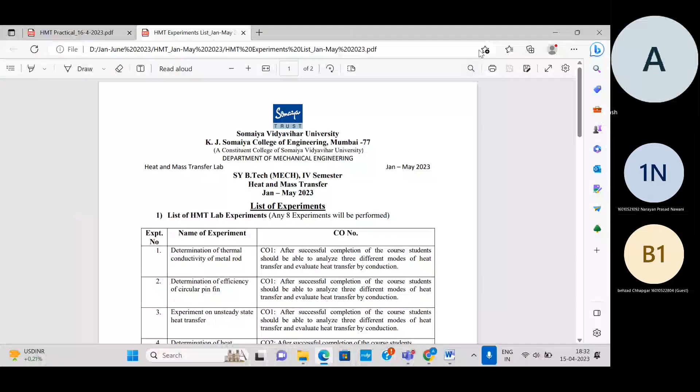Okay, so I've shared the screen. Yes, can you see my screen properly? The list of experiments?

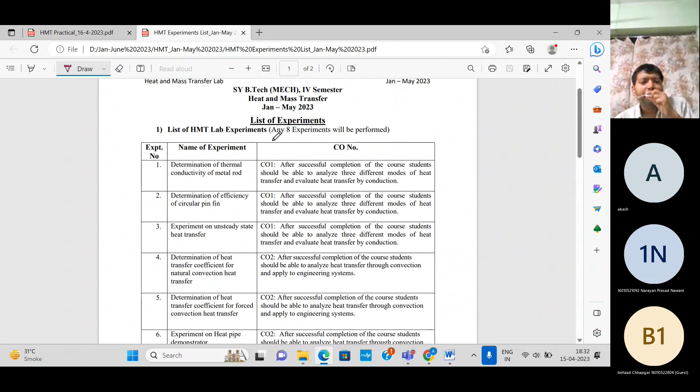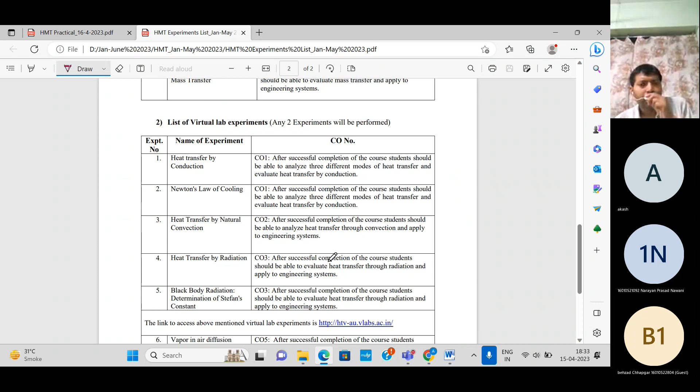We have already performed 8 experiments from this lab experiment list, and this is a list of virtual lab experiments. From this list, we have to perform two virtual lab experiments: heat transfer by natural convection, and black body radiation, that is determination of Stefan's constant.

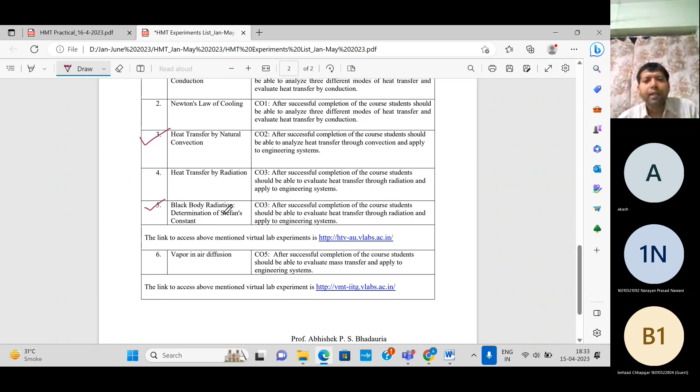Now you just see here, I've given the link to access these virtual lab experiments. One way to perform the experiment is you just click on this link, and you will be able to access any virtual lab experiment. Another way is you just go to Google.

Just give me a minute. You just go to Google and you just type: virtual lab experiments, heat transfer, natural convection.

So it will open this page. Now you click on this heat transfer by natural convection. The page will open.

You can see there are 7 tabs: tab 1 is the theory tab, tab 2 is the procedure tab, tab 3 is the self evaluation tab, tab 4 is the simulator tab, tab 5 is the assignment tab, tab 6 is the reference tab, and tab 7 is the feedback tab. First I will talk about the tabs.

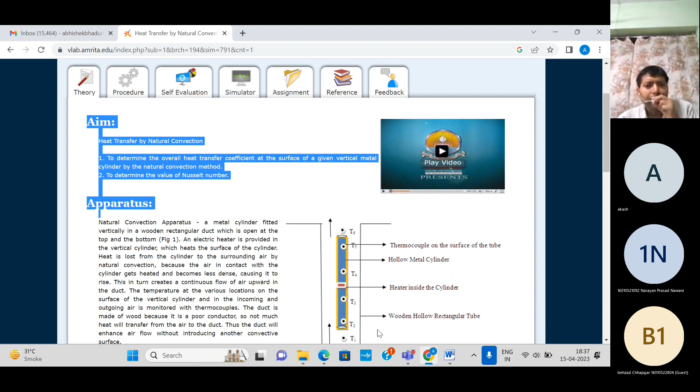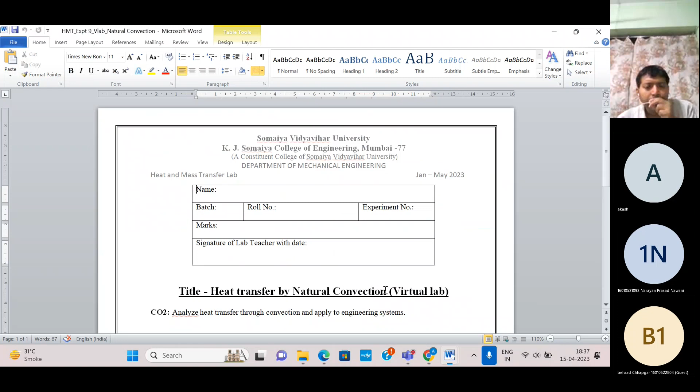What you need to do is, in the theory tab, copy all the details right from the aim to the last part, that is the application section. Copy all the details from the theory tab, go to the word file template of this experiment, and where I've written 'virtual lab details,' paste the entire content there.

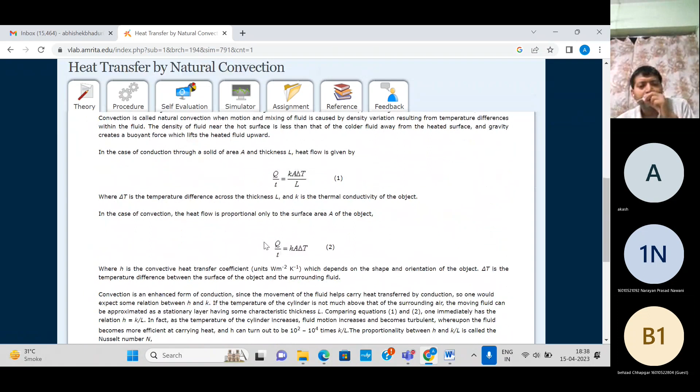Now see, this is the second tab I clicked, the procedure tab. So from the start, the theory tab is automatically enabled by default. In the theory tab, you can see the aim, the apparatus, and the construction of the setup, the theory related to this concept and experiment, and the applications. I will explain all these things later.

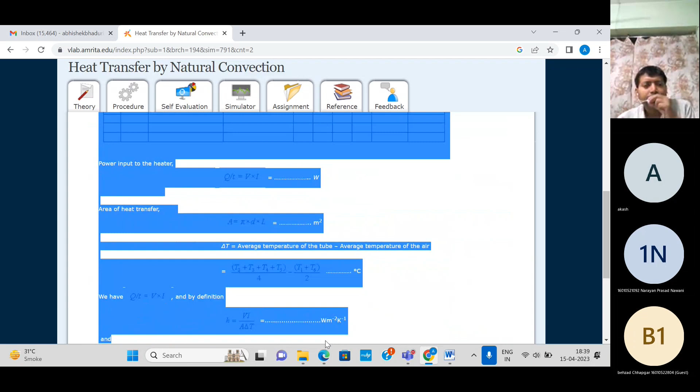ये पूरा सेलेक्ट करके इसे कॉपी करो, और उसके बाद वर्ड फाइल टेम्पलेट में जा करके यहाँ वर्चुअल लैब डिटेल्स में जो आपने थ्योरी टैब के डिटेल्स कॉपी करके पेस्ट किए थे, उसके नीचे आप पेस्ट करो सारी डिटेल्स जो प्रोसीजर टैब में मेंशन्ड हैं। ठीक है, इसके बाद आपको क्या करना है

Now after this, you just see this, the third tab is self evaluation tab. When you will click on this self evaluation tab, you will get the MCQs, multiple choice questions. You can solve those multiple choice questions for enhancing your knowledge, for testing your knowledge, but it is not the part of submission.

Now the fourth tab, that is the most important tab, that is the simulator for making the simulation.

अब इसमें क्या करो आप, you just click here. So you will be able to open this window in the full screen. Okay, now you just see this.

This is the setup. अभी सेटअप में क्या करो आप, यहाँ पर ये देखो, यहाँ पर सब डिटेल्स दिया हुआ है, सेटअप का कंस्ट्रक्शन डिटेल्स है, सब कुछ दिख रहा है। Here what is this, duct is there which is open at the top and at the bottom, and we have fitted this

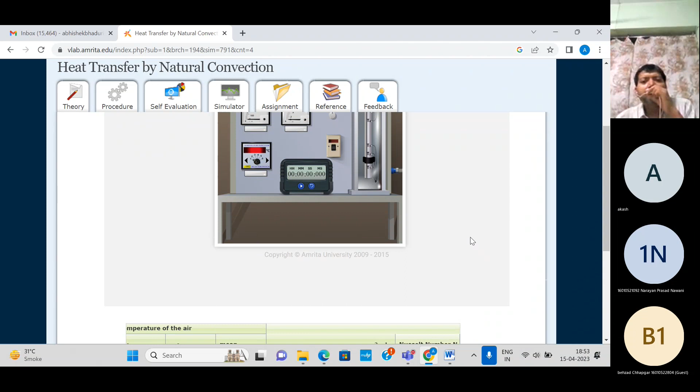हाँ सर, और सर कंपेयर किससे करना है? प्रैक्टिकल. कंपेयर करना है आपको सिमुलेटेड रिजल्ट. मैं भी बताऊंगा जैसे हम सिमुलेशन करेंगे. देखो अभी हमने परफॉर्म नहीं किया तो यहाँ पे 0 0 वैल्यू दिख रही है, दिख रहा है कर्सर मेरा. जब इसको ऑन करेंगे और सिमुलेशन हो जाएगा तो आफ्टर द कंप्लीशन ऑफ सिमुलेशन इट विल डिस्प्ले द सिमुलेटेड वैल्यू ऑफ कन्वेक्टिव हीट ट्रांसफर कोफिशिएंट एंड नसेल्ट नंबर. सो ये सिमुलेटेड रिजल्ट्स हैं.

ओके, सो इसके साथ आपको कंपैरिजन करना है तो वो ऑटोमेटिक आ जाएगा. ठीक है, तो मैंने आपको बताया कि एनालिटिकली कैसे कैलकुलेशन करनी है सैंपल. तो यहाँ पर आपको करने की जरूरत नहीं पड़ेगी, आप जस्ट वैल्यू फीड करेंगे तो ऑटोमेटिकली कैलकुलेट कर देगा. लेकिन यहाँ पे टेम्पलेट में आप जस्ट शो कर देना वन और टू सैंपल कैलकुलेशन. Q इज इक्वल टू एच ए डेल्टा टी. एंड नसेल्ट नंबर इज इक्वल टू एच एल बाय के. टू सैंपल कैलकुलेशन यू जस्ट शो हियर.

चलिए अभी हम वन बाय पूरा देख लेते हैं क्या थ्योरी है एंड प्रोसीजर, और उसके बाद सिमुलेशन कैसे करना है, सो दैट वी विल बी एबल टू परफॉर्म दिस एक्सपेरिमेंट. ओके, सो लेट्स गो टू द ओके.

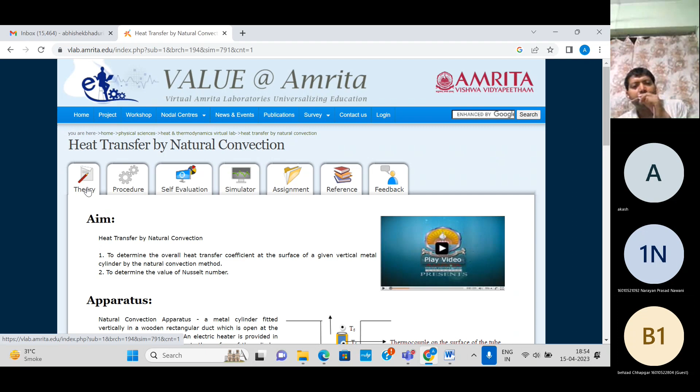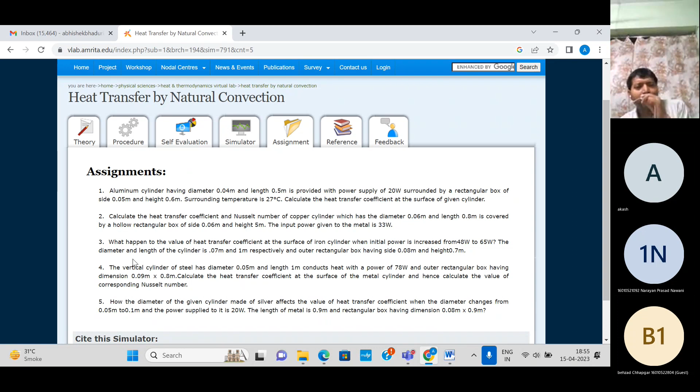हाँ, थोड़ी सी बात ये और रह गई थी. मैंने आप लोगों को टैब के बारे में बताया था. तो यू जस्ट रिमेंबर ओनली 3 टैब्स आर इंपॉर्टेंट फॉर परफॉर्मिंग दिस एक्सपेरिमेंट - टैब नंबर 1 थ्योरी टैब, टैब नंबर 2 प्रोसीजर टैब एंड टैब नंबर 4 सिमुलेटर टैब. सेल्फ इवैल्यूएशन टैब में जब आप जाएंगे, इट विल डिस्प्ले MCQ, सो यू कैन सॉल्व दोज़ MCQs फॉर टेस्टिंग योर नॉलेज, फॉर एन्हांसिंग योर नॉलेज, बट इट इज नॉट द पार्ट ऑफ सबमिशन. एंड जब आप असाइनमेंट टैब पे क्लिक करेंगे, सो इट विल शो द असाइनमेंट क्वेश्चंस, सो यू कैन सॉल्व दोज़ असाइनमेंट क्वेश्चंस फॉर एन्हांसिंग योर नॉलेज, बट इट इज आल्सो नॉट द पार्ट ऑफ सबमिशन. ठीक है, एंड रेफरेंस टैब में द डिटेल्स आर मेंशन्ड फॉर प्रिपेयरिंग दिस वर्चुअल लैब एक्सपेरिमेंट, सो आल्सो नॉट द पार्ट ऑफ सबमिशन.

हाँ, जब आप ये वर्चुअल लैब एक्सपेरिमेंट कर लेंगे देन यू गिव द फीडबैक. ठीक है, जिसमें फीडबैक आप जरूर दे देना. तो फीडबैक के लिए इट विल आस्क फॉर लॉग इन. इन फैक्ट, इट मे आस्क टू लॉग इन फॉर द सिमुलेटर आल्सो. ओके, सो इफ यू हैव नेवर विजिटेड दिस वर्चुअल लैब वेबसाइट, सो फर्स्ट ऑफ ऑल यू जस्ट रजिस्टर ऑन दिस वर्चुअल लैब वेबसाइट. ओके, सो आफ्टर द सक्सेसफुल रजिस्ट्रेशन, यू विल गेट वन यूजरनेम एंड पासवर्ड. सो विथ दैट यूजरनेम एंड पासवर्ड, यू कैन लॉग इन टू दिस वर्चुअल लैब वेबसाइट एंड यू कैन एक्सेस एनी वर्चुअल लैब एक्सपेरिमेंट. ठीक है, तो आप लोग ये फीडबैक जरूर दे देना वर्चुअल लैब एक्सपेरिमेंट का, परफॉर्म करने के बाद, बिकॉज दे आस्क दिस.

सर ओके, फीडबैक को पेस्ट करना है क्या इस पे? नहीं नहीं नहीं, फीड पेस्ट नहीं करना है. हाँ, पेस्ट नहीं करना है, जस्ट आप दे देना, क्योंकि दे आस्क दिस टू गिव द फीडबैक आफ्टर परफॉर्मिंग दिस. ओके, यूनिवर्सिटी पर्सन आस्क दिस कि यू कन्वे द मैसेज टू द स्टूडेंट, सो कि आफ्टर परफॉर्मिंग द एक्सपेरिमेंट यू जस्ट गिव द फीडबैक. तो आप लोग फीडबैक प्लीज दे दीजिएगा, कॉपी पेस्ट करने की जरूरत नहीं है.

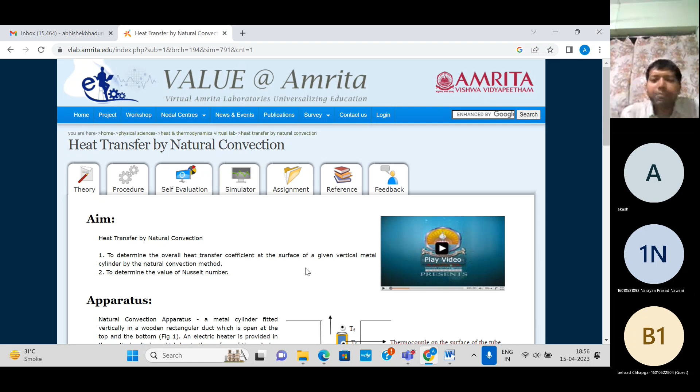ओके, चलिए अभी हम आते हैं दैट. अभी यहाँ पर देखिए, व्हाट इज द एम फॉर परफॉर्म दिस एक्सपेरिमेंट. सो द एम फॉर परफॉर्म दिस एक्सपेरिमेंट इज, फर्स्ट ऑफ ऑल यू जस्ट मेक द करेक्शन. यहाँ पर लिखा हुआ है टू डिटरमाइन ओवरऑल हीट ट्रांसफर कोफिशिएंट, लेकिन इट इज नॉट ओवरऑल हीट ट्रांसफर कोफिशिएंट. ओवरऑल हीट ट्रांसफर कोफिशिएंट इज डिनोटेड बाय कैपिटल U. ओके, वी आर नॉट गोइंग टू कैलकुलेट ओवरऑल हीट ट्रांसफर कोफिशिएंट. वी हैव टू कैलकुलेट कन्वेक्टिव हीट ट्रांसफर कोफिशिएंट, दैट इज स्मॉल h. ओके, सो दिस इज अ करेक्शन. सो वी हैव टू डिटरमाइन द कन्वेक्टिव हीट ट्रांसफर कोफिशिएंट, दैट इज स्मॉल h, एट द सरफेस ऑफ अ गिवन वर्टिकल मेटल सिलिंडर. ओके, दिस इज अ गिवन वर्टिकल मेटल सिलिंडर. फाइन, बाय द नेचुरल कन्वेक्शन मेथड. ओके, सो हियर नेचुरल कन्वेक्शन इज गोइंग ऑन, सो वी हैव टू कैलकुलेट द कन्वेक्टिव हीट ट्रांसफर कोफिशिएंट फ्रॉम द सरफेस ऑफ दिस वर्टिकल मेटल सिलिंडर.

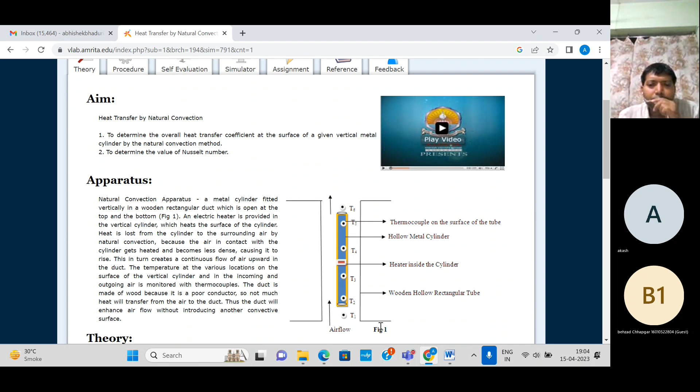So let's see the construction of this setup. You just see what is this - this is a rectangular tube, so it is like a duct. We have taken a duct which is open at the bottom and at the top, and we have placed a metal cylinder, fitted in the vertical fashion inside this duct.

Very simple - what we have done is we have taken this rectangular tube, that means a duct which is open at the bottom and at the top. Now we have fitted a metal cylinder vertically inside this duct. We have placed the heater along the length of this vertical cylinder. We have placed 4 thermocouples at 4 different locations along the length of this vertical cylinder, that is T2, T3, T4, T5. And we have placed 2 thermocouples, T1 and T6, for measuring the ambient air temperature inside this duct.

Now what we will do is provide the power supply to the apparatus. We will turn on the heater, so the heater will heat the surface of this vertical cylinder. So the heat transfer takes place by natural convection from the surface of this vertical cylinder to the air that is available inside this duct.

We have to record the temperature value at the 6 different locations - that is 4 on the metal cylinder and 2 for measuring the ambient temperature - every 15 minutes, again and again, till steady state is reached. After achieving steady state, we have to use the steady state temperature values for making calculations.

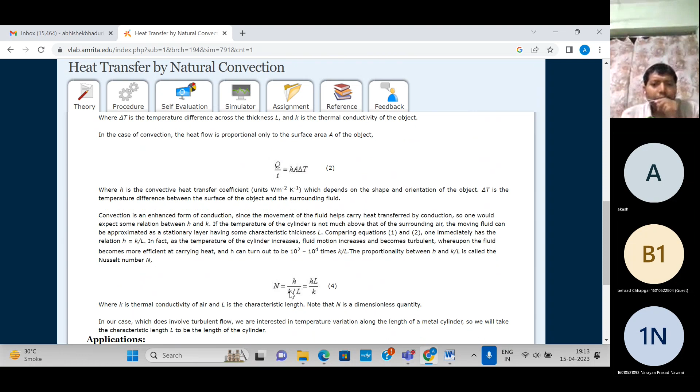Now we know what is the Nusselt number. We have discussed the physical significance and importance of all the dimensionless numbers in detail in the lecture. We know this Nusselt number is HL by K, where H is the convective heat transfer coefficient, L is the characteristic dimension, and K is the thermal conductivity. So this Nusselt number can be either HL by K or HD by K, depending on what is our characteristic dimension. It can be length or it can be diameter.

So here it is L, L is the characteristic dimension, that's why the Nusselt number is HL by K. With this expression we can calculate H, the convective heat transfer coefficient, and with this expression we can calculate the Nusselt number. This is how we calculate the analytical value of the convective heat transfer coefficient and Nusselt number.

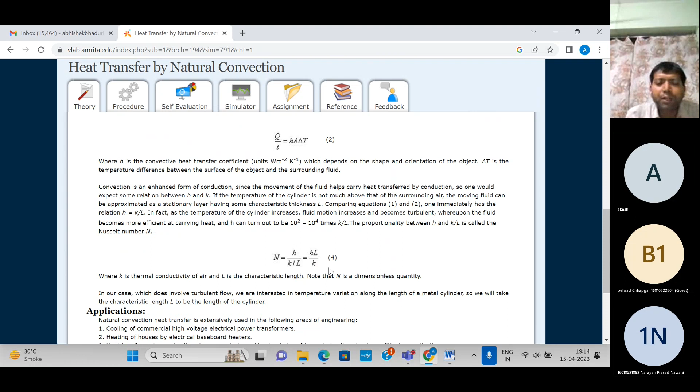Now these are the applications mentioned here where we can see natural convection. We can see the natural convection phenomena in the cooling of commercial high voltage electrical power transformers, in the heating of houses by electrical baseboard heaters. Another general application is the heat loss from steam pipelines in power plants and heat gain in refrigerant pipelines in air conditioning applications, and so on. So these are the various applications of natural convection.

Now let's see the procedure. We'll click on the procedure tab. Just see the steps, read each and every step and follow it, so we will be able to perform this natural convection experiment very comfortably.

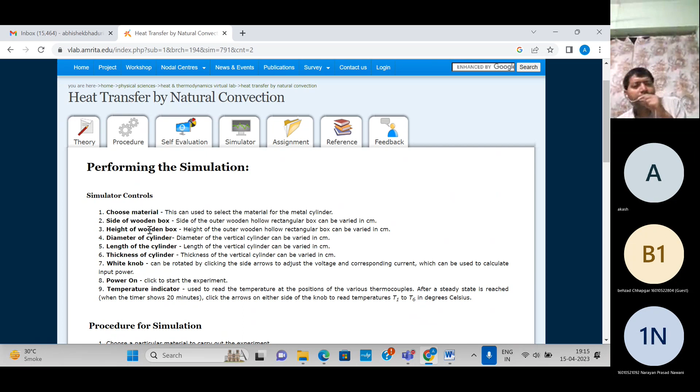Now, let's come to the procedure. First step is we will choose the material. The drop down list is there, from the drop down list we'll choose the material - aluminium, copper, and likewise we can select the material.

Now the side of the wooden box, a slider is there, so with the help of the slider we can change the dimension for the side of the wooden box. By sliding the slider, we can give the input value to the height of the wooden box. In the similar fashion, by just sliding the slider, we can assign the input value to all the parameters - we can give the input value to the diameter of the cylinder, length of the cylinder, thickness of the cylinder, and the white knob is there.

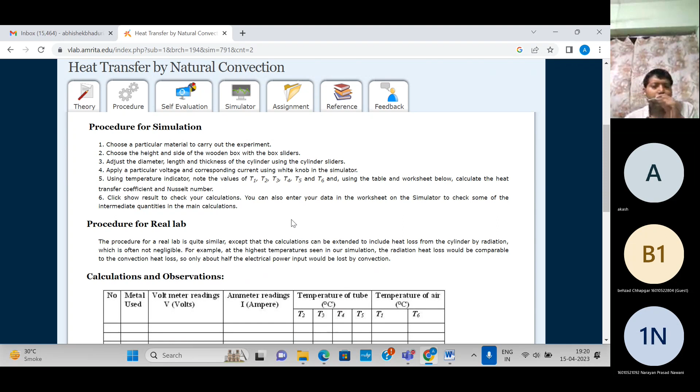And then when we click on the result, it will show the simulated result for H and Nusselt number in the bottom right corner. So these results will be the simulated results.

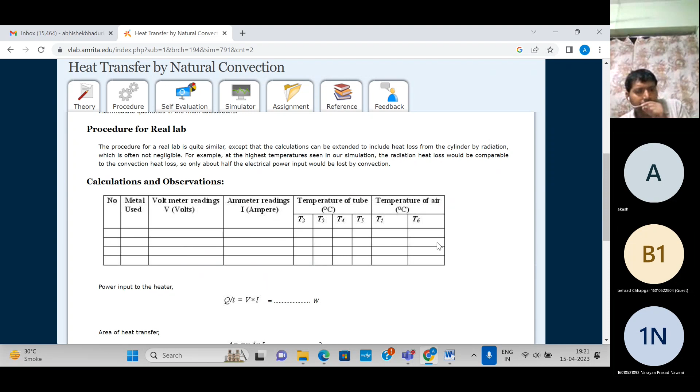Okay, so we can fill the table like this. Now how can we calculate Q?

Ignore the small t, just write Q. Q is the heat input, which is nothing but the product of voltage and current. We know the value of voltage and the corresponding current value. We'll take the product of voltage and current, and this way we can calculate the heat input value.

How can I calculate area? This is surface area, and this is the metal. This is a cylinder, a tube, so it's like a cylinder. The surface area for the cylinder is pi into d into L. D is the diameter of the cylinder, L is the length. We know the diameter and the length, so we'll take the product, and this way we can calculate the surface area.

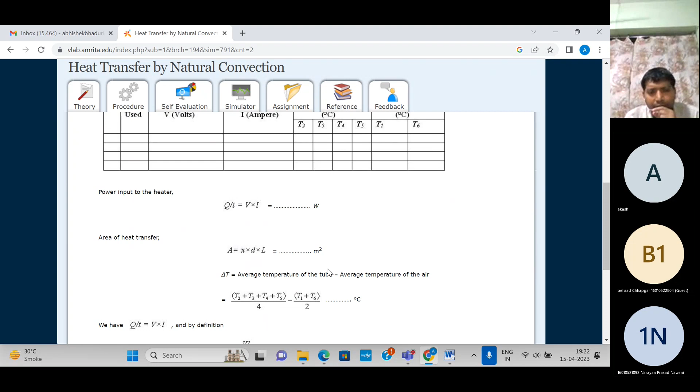Now we know the formula for calculating H. We'll apply Newton's law of cooling. So Q is equal to H into A into delta T.

How did we calculate Q? By taking the product of voltage and current. Now surface area we have also calculated.

Now how to calculate delta T? Delta T is Ts minus Ta. Ts is the average steady state temperature value on the surface of the metal cylinder, that is T2 plus T3 plus T4 plus T5 divided by 4. Ta is the average steady state temperature of the surrounding, that is T1 plus T6 divided by 2. So we'll take the difference, and this is how we can calculate delta T.

So Q is equal to H into A into delta T. Q we have calculated by taking the product of voltage and current, surface area we have already calculated, and delta T we have already calculated. In this way we can calculate the convective heat transfer coefficient analytically.

Now we have to calculate the Nusselt number. Nusselt number is equal to HL by K. The H value we have already calculated. We know the characteristic dimension of this tube, that is the length of the tube. You just mention the length of the tube and divide by K. K is the thermal conductivity of air. So what is the normal procedure to take the thermal conductivity of air?

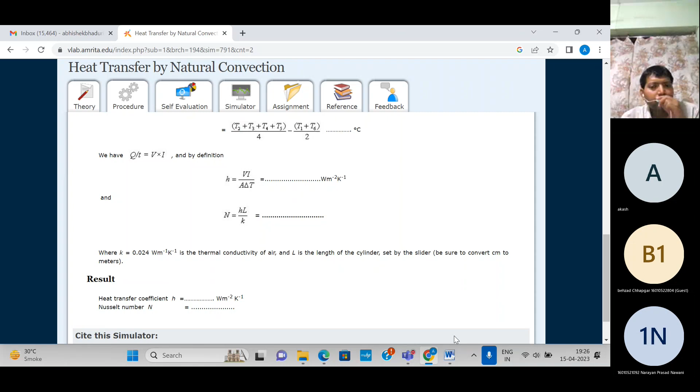चलिए, इसके बाद फिर आपका कुछ भी नहीं रहता है, फिर आप यहाँ पर 2 सैंपल कैलकुलेशन दिखा दिया आपने एनालिटिकल, हाउ टू सैंपल कैलकुलेशन फॉर कैलकुलेटिंग कन्वेक्टिव ट्रांसफर कोफिशिएंट नसल नंबर, और इधर आप रिजल्ट दिखा दो। रिजल्ट आप टेबुलेटेड फॉर्म में भी दिखा सकते हैं, एच और नसल्ट नंबर का एनालिटिकल और सिमुलेटेड रिजल्ट।

सर जो सिमुलेशन से सब जो वैल्यूज आएंगे वो टेबल में उसका स्क्रीनशॉट डालना है ना? हाँ, स्क्रीनशॉट जब आप लोगे तो उसमें सब वैल्यूज आ जाएंगे डायरेक्टली, लेकिन यहाँ रिजल्ट में आपको थोड़ा लिखना पड़ेगा टेबल बना के। और कंक्लूजन में जब फिर आपके रिजल्ट कंपेरेबल आए, तो फिर यू राइट द मीनिंगफुल कंक्लूजन एट द लास्ट।

ठीक है। और ये जस्ट, देखो अभी कैसे लिख सकते हो मैं बताता हूँ। रिजल्ट आप ऐसा बना सकते हो, मैं 1 मिनट, देखो आप टेबल ऐसा बना सकते हो।

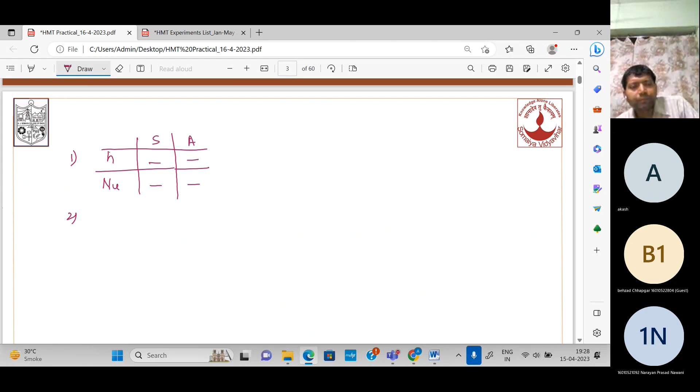देखो इधर आपका आ गया जैसे एच और नसल्ट नंबर। ठीक है। यहाँ पर आप देख सकते हो, यहाँ पर आपका सिमुलेटेड रिजल्ट क्या आ रहा है, और यहाँ पर आपका एनालिटिकल रिजल्ट क्या आ रहा है। इस तरीके से यू कैन राइट, तो यू विल मेंशन द एच वैल्यू, सिमुलेटेड रिजल्ट, एनालिटिकल रिजल्ट, और नसल वैल्यू, सिमुलेटेड और एनालिटिकल। इस तरीके से आप ऐसा लिख सकते हो, केस 1, फिर यहाँ 2, 3, ऐसा करके। अंडरस्टूड।

हाँ सर, ये कैलकुलेशन में डालना है ना सर, रिजल्ट में डालना है ना ये? हाँ हाँ, रिजल्ट में। ठीक है, ऐसे लिख सकते हो, 1 के लिए क्या आया, 2 के लिए क्या आया, 3 के लिए, आप ऐसा टेबल बना सकते हो सीरियल नंबर वगैरह करके। फिर 2 आ गया, फिर 3 आ गया, ऐसा 4, 5 ऐसा करके कर सकते हो, तो दिस इज वन वे टू प्रेजेंट द रिजल्ट। अदरवाइज आपको जैसा आप प्रेजेंट करना चाहें वैसा भी कर सकते हैं।

ओके, अभी देखते हैं सिमुलेशन कैसे करते हैं। जस्ट गिव मी अ मिनट, जैसे हम फिर देखते हैं।

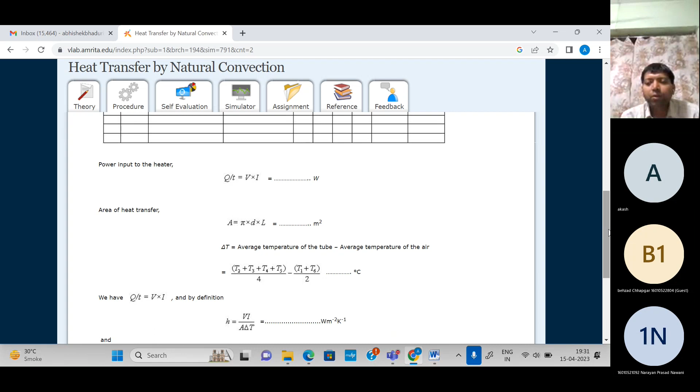हाँ सर। Okay. सर ये जो कैलकुलेशन का ये सब जो पार्ट है इसमें कुछ ऐड नहीं करना है ना, बस टेबल फिल करना ना। नहीं नहीं, कैलकुलेशन जो है आपने इसमें आपको कुछ नहीं करना है, समझाने के लिए बताया। देखो आप तो टेम्पलेट कंप्लीट करो, दैट्स इट।

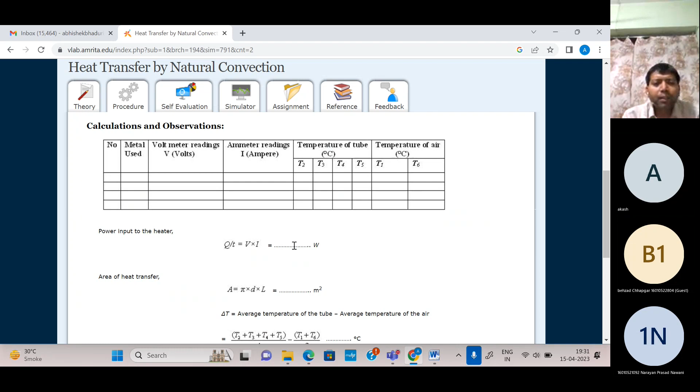पीछे वाले पेज में वो आप सर वर्चुअल लैब वाले पेज पे जाओ ना। हाँ ये सब सर, ये सब ऐड किया ना हम लोग ने उसमें, उसके लिए पूछ रहा हूँ। हाँ देखो, ये सब कॉपी करके पेस्ट कर देना उधर वर्चुअल लैब डिटेल में, यहाँ पे चला जाएगा पूरा। हाँ सर, उसको पेस्ट करना, बट उसको फिल भी करना है ना, कि उसको रहने दो। वो मैं आपको बताता हूँ, अभी वो फिल हो जाएगा। सिमुलेशन करेंगे ना, तो वो मैं आपको टेबल बताऊंगा। मैंने बताया था ना एनालिटिकल कैसे कैलकुलेट हो रहा है, उसे ऑटोमेटिक वो टेबल्स बन जाएंगे, आपको उधर कुछ अलग करने की जरूरत नहीं है।

ये तो समझ में आया ना कैसे टेम्पलेट कंप्लीट करना है? हाँ सर। हाँ ठीक है, तो जस्ट अ मिनट, हम जाएंगे। हाँ, आपको दिख रहा है ये स्क्रीन? हाँ सर।

चलिए अभी हम ये देखेंगे सिमुलेशन में। सो जस्ट विल सी हाउ टू मेक द सिमुलेशन। विल क्लिक ऑन सिमुलेटर। अभी यहाँ पे यू क्लिक हियर, सो द यू विल बी एबल टू ओपन दिस इन द फुल स्क्रीन। ठीक है, अभी आप लोग वैल्यूज लिखते जाना, क्योंकि पहला केस जो है अपना सेम इनपुट वैल्यू के लिए, अदरवाइज हमें याद नहीं रहेगा इनपुट वैल्यूज क्या लिया है। तो ओके, आई एम राइटिंग दिस।

अभी देखो, सबसे पहले अपने को क्या करना है, यहाँ पर देखो दिस इज ड्रॉप डाउन लिस्ट। अभी देखो सेटअप अपने को वही है। Duct is open at the bottom and at the top. Metal cylinder is fitted vertically inside this duct. 4 thermocouples are placed on the metal cylinder. 2 thermocouple for measuring ambient temperature. Voltmeter, ammeter, white knob for controlling, for adjusting voltage value. Temperature indicator for recording temperature value. Main switch and stopwatch.

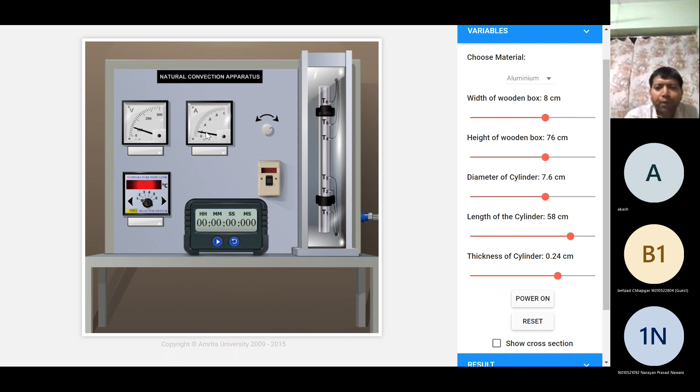ठीक है, अभी ये मैंने मटेरियल ले लिया। अभी क्या करना है, आप जस्ट क्लिक करो यहाँ व्हाइट नॉब पर वोल्टेज वैल्यू एडजस्ट करने के लिए। मैं यहाँ क्लिक करूँगा, देखो 100 वोल्ट है और करस्पॉन्डिंग करंट वैल्यू है 0.2 एम्पियर। इसके बाद आप क्लिक करो शो क्रॉस सेक्शन पर, सो यू विल बी एबल टू विजुलाइज द इंटरनल स्ट्रक्चर।

Now we will click on power on to start the simulation. You just see temperature is changing.

थोड़ी देर रन होने दो इसे। ये देखो, 20 मिनट जैसे ही पहुंचेगा वो स्टेडी स्टेट अचीव कर लेगा, टेम्परेचर स्टॉप्स चेंजिंग। ये फ्लो तो अपने आप दिखता रहेगा, दैट मीन सिमुलेशन इज ओवर। एक्चुअली वर्चुअल लैब में जैसे यहाँ 20 मिनट्स फीड किया हुआ है, वैसे ही वो स्टेडी स्टेट पहुंच रहा है। अल्टीमेटली वी नो व्हाट इज स्टेडी स्टेट, टेम्परेचर स्टॉप्स चेंजिंग। तो उन्होंने ऑटोमेटिक प्रोविजन करके रखा है कि एज द स्टॉप वॉच रीचेस 20 मिनट्स तो स्टेडी स्टेट आ जाता है। एंड ये स्टॉप वॉच का 20 मिनट्स है, एक्चुअल में तो दिस विल बी कंप्लीटेड विदइन अ मिनट।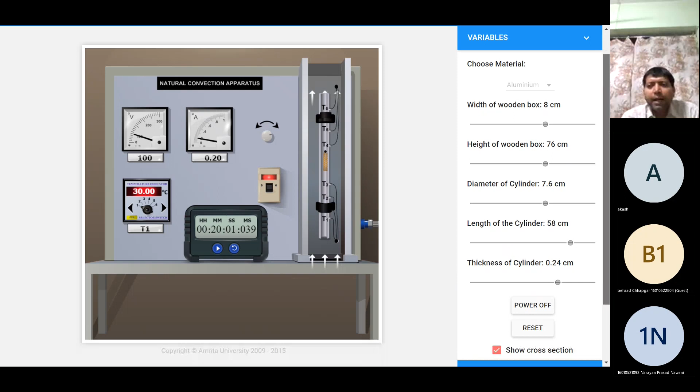Okay, अभी मुझे नेक्स्ट सिमुलेशन करना है, तो रीसेट पे क्लिक करो। रीसेट पे क्लिक किया, नेक्स्ट मटेरियल लेते हैं। देखो केस वन है अपना, वोल्टेज वैल्यू सेम रखना है, मटेरियल बस चेंज करना है, इनपुट वैल्यूज भी सेम रखना है।

इसको फुल स्क्रीन में ओपन किया, मटेरियल चेंज करेंगे। यहाँ पर मैंने अभी नेक्स्ट टाइम कॉपर ले लिया। देखो आपका फिजिकल अपीयरेंस भी चेंज हो जाता है। जब एल्यूमिनियम था तब कैसा दिख रहा था, कॉपर में ऐसा आ गया, आयरन में देखो कैसा हो गया, सिल्वर में, स्टील में - फिजिकल अपीयरेंस चेंज हो रहा है।

Now you just see I have selected copper. Show cross section पे क्लिक किया मैंने। अभी देखो सेम इनपुट वैल्यूज आई विल गिव, विड्थ दिया था 8 सेंटीमीटर लास्ट टाइम भी, क्योंकि सेम इनपुट वैल्यू ही रखना है।

ओके 8 सेंटीमीटर, हाइट ऑफ वुडन बॉक्स 76 लिया था, डायमीटर 7.6 सेंटीमीटर लिया था, लेंथ 58 सेंटीमीटर लिया था, थिकनेस 0.24 सेंटीमीटर लिया था। सो व्हाट आई हैव डन, आई हैव चेंज द मटेरियल। पहले एल्यूमिनियम था,

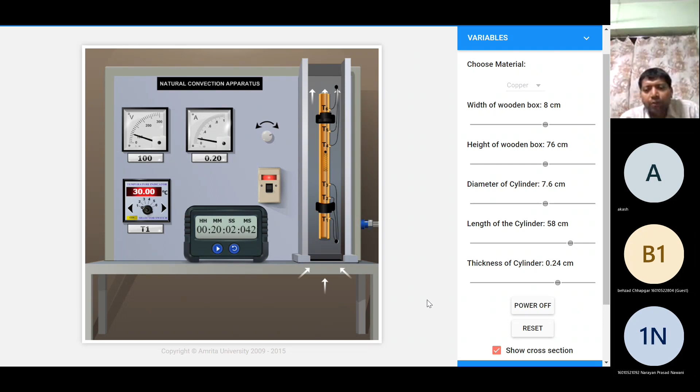Now you just click the result. सर कॉपर का स्टेडी स्टेट अचीव होने के लिए थोड़ा जल्दी होगा ना, 20 मिनट से थोड़ा जल्दी होना चाहिए ना, क्योंकि वो ज्यादा कंडक्टिव है। हाँ देखो, जब हम फिजिकली करेंगे, when we will perform this experiment physically, तब ये डिफरेंस आएंगे। यहाँ पर वर्चुअल लैब में एक ऐसा प्रोग्रामिंग करके रखा है कि 20 मिनट्स में स्टेडी स्टेट आ रहा है।

ओके, ये सारी चीजें तब कंसीडर होंगी जब हम फिजिकली ये सेटअप, फिजिकल सेटअप में लैब में परफॉर्म करेंगे। अभी देखिए रिजल्ट आ गया, तो रिजल्ट इज है ना,

H इज इक्वल टू 2.38394 वॉट पर मीटर स्क्वायर केल्विन, और नसेल्ट नंबर आपका आ गया 75.49128। सो दिस रिजल्ट वी गॉट। अब इस सिचुएशन में, अब नाउ माय एंटायर

सेटअप इज विजिबल, ऑल द इनपुट वैल्यूज आर विजिबल, सो क्रॉस सेक्शन इनेबल्ड है फुल स्क्रीन में। ये मैंने ओपन करके रखा है और सभी रिजल्ट दिख रहे हैं। इस सिचुएशन में यू जस्ट टेक द स्क्रीनशॉट, कॉपी दैट स्क्रीनशॉट

एंड पेस्ट इट एट रिक्वायर्ड प्लेस इन आवर वर्ड फाइल टेम्पलेट। ठीक है, तो इस तरीके में सेकंड सिमुलेशन कर लिया। अब मुझे थर्ड करना है, रीसेट करो पर क्लिक करो।

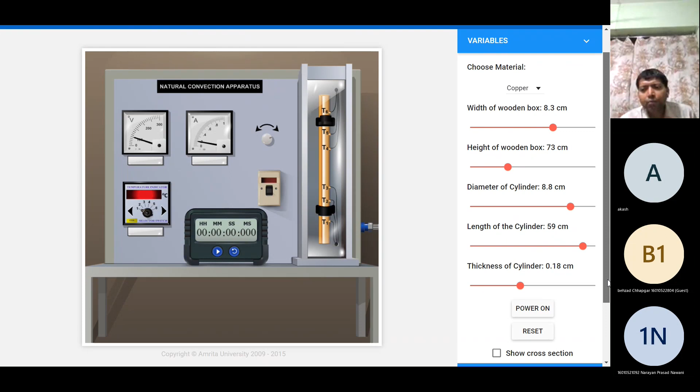तो इस सेकंड केस में क्या करना है, वी हैव टू चेंज द मटेरियल एंड वी हैव टू चेंज द इनपुट वैल्यूज, बट वी हैव टू टेक द सेम वोल्टेज वैल्यू। यानी अगर 100 वोल्ट लिया है तो 100 वोल्ट ही लेंगे सभी, फॉर ऑल द 5 मटेरियल, एंड we'll click on power on। पहले शो क्रॉस सेक्शन कर लेंगे, नाउ वी क्लिक ऑन पावर ऑन।

ठीक है, नाउ इट हैज अचीव्ड स्टडी स्टेट। अभी इसका रिजल्ट देखो, ये आ गया 2.00311, नसेल्ट नंबर इज दिस 60.92। फाइन, नाउ यू टेक द स्क्रीनशॉट, copy that screenshot and paste it at the required place in our word file template for case 2।

ठीक है, तो ऐसे ही आप करते जाना, मटेरियल चेंज करते जाना और इनपुट वैल्यूज चेंज करते जाना, वोल्टेज वैल्यू सेम रखना। इस तरीके से 5 मटेरियल्स के लिए 5 सिमुलेशंस हो जाएंगे। सर इनपुट वैल्यूज हम लोग अपने हिसाब से ले चलेगा? हाँ, अपने हिसाब से ले लो।

ओके सर, ठीक है, अब मैं आपको एनालिटिकल का और दिखा देता हूँ कैसे करना है, दिस इज द लास्ट पार्ट, सो ये हमारा कंप्लीट हो जाएगा। अभी देखो, एक बार एल्यूमिनियम का जो हमने किया था वो एक बार फिर से देखते हैं। तो मैं आपको टेबल में कैसे कैलकुलेट करेंगे, T1 का अपने को टेम्परेचर का वैल्यू मालूम होना चाहिए ना, एक बार देख लेते हैं। देखो, एल्यूमिनियम का सपोज मैंने किया, अभी देखो इसका मैंने वैल्यू लिया 8 पॉइंट सपोज 8 सेंटीमीटर।

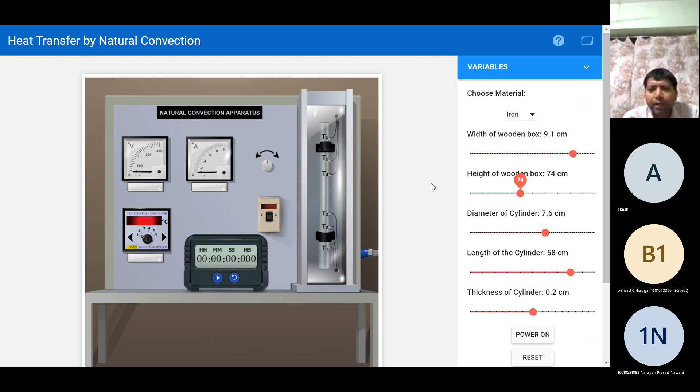चलो सपोज इस बार मैंने आयरन लिया। इस बार मैंने वैल्यूज भी चेंज ले ली है। 9.1 सेंटीमीटर हाइट मैंने ले लिया है, 74 डायमीटर, 6.3 सेंटीमीटर लेंथ ले लिया 55 सेंटीमीटर, थिकनेस ले लिया सपोज 0.15 सेंटीमीटर। तो अभी मैंने क्या किया, शो क्रॉस सेक्शन में क्लिक करो। अभी मैंने मटेरियल भी चेंज किया और इनपुट वैल्यू भी चेंज किया और वोल्टेज वैल्यू मैंने 100 वोल्ट रखा। तो केस 2 का ही करना है, ठीक है। अभी आई विल क्लिक ऑन पावर ऑन।

तो इस तरीके से आप केस 2 का कर सकते हैं ना, बस मटेरियल भी चेंज करते जाओ, इनपुट वैल्यूज भी चेंज करते जाओ, बस वोल्टेज वैल्यू सेम रखना है।

ओके, सो इट हैज रीच्ड 20। सो इट हैज अचीव्ड स्टडी स्टेट। अभी देखते हैं क्या रिजल्ट आ रहा है। रिजल्ट कोई आ गया 3.34, वाट पर मीटर स्क्वायर केल्विन, दिस कन्वेक्टिव ट्रांसफर कोएफिशिएंट नसेल्ट नंबर 103। ठीक है, चलो इसको लिख के रखते हैं। अब हम इस केस का मैं आपको वो दिखा देता हूँ।

अभी देखो, विड्थ इज, मटेरियल इज आयरन, width 9.1, height 74, diameter 6.3, length 55, thickness 0.15। ठीक है, और H का वैल्यू क्या आ गया, H इज 3.34 वाट पर मीटर स्क्वायर केल्विन, नसेल्ट नंबर इज 103.10806।

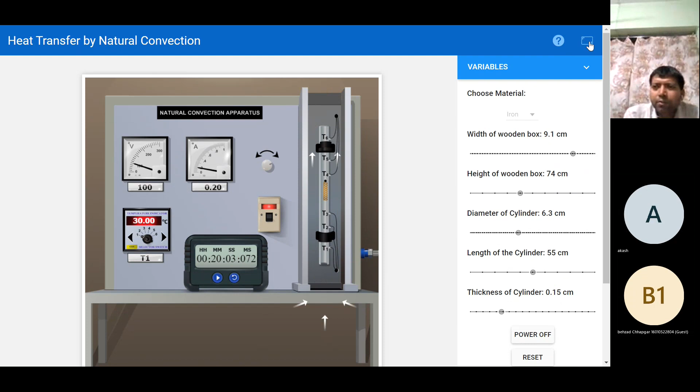ठीक है, तो इस तरीके से आप केस 2 का कर सकते हैं। तो अभी नेक्स्ट में भी आप बस मटेरियल चेंज करते जाना। चलिए अभी हम इसको स्मॉल स्क्रीन में किया। अभी देखो, टेबल में कैसे करेंगे इसका ही केस लेते हैं।

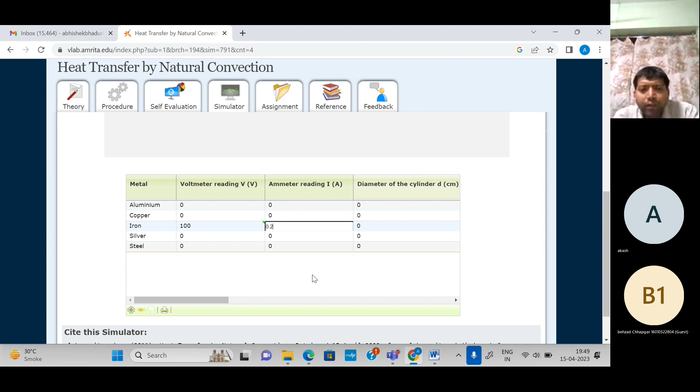देखो आयरन, आयरन के वोल्टेज वैल्यू कितना है, आप ही लोग बताओ। 100 वोल्ट, करंट 0.2। तो देखो आयरन वाले टेबल में आप इधर 100 वोल्ट पुट करो, करंट 0.2 एम्पियर। अभी डायमीटर पुट करो, डायमीटर कितना था सिलेंडर का, यहाँ से देखो आप, डायमीटर है 6.3 सेंटीमीटर, लेंथ है 55 सेंटीमीटर।

डायमीटर 6.3, लेंथ इज 55। तो पाई डीएल से ऑटोमेटिकली इट विल कैलकुलेट द सरफेस एरिया। अभी देखो T2 T3 T4 T5 ये वैल्यूज कहाँ से आएंगे, ये देखो आप यहाँ पे क्लिक करो तो यू विल गेट दिस। आप ही लोग बोलो T2 के कितना दिख रहा है, 23.98। हाँ 23.98।

अभी T2 T3 देखेंगे, I will click here. What is T3? आप ही लोग बोलते जाइए, कितना है T3? 25.98। अच्छा 25.98 है ना। चलो मतलब आ गया समझ में आप लोगों को। तो अभी मैं दिखा के करता जाता हूँ 25.98।

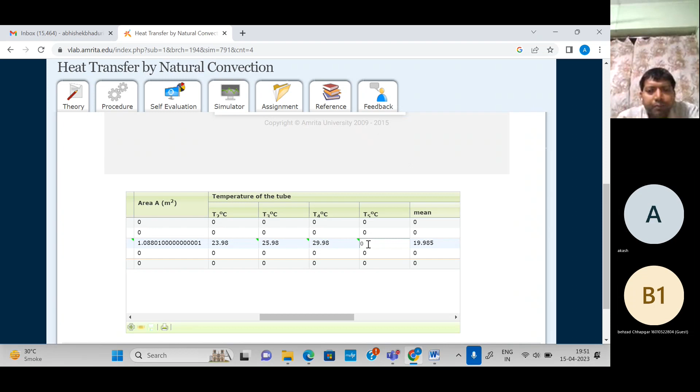अभी देखो T4, इधर T4 पे क्लिक किया, देखो ये टेम्परेचर आएगा 29.98, ठीक है। T5, T5 है 31.98। देखो एवरेज वैल्यू उसने ऑलरेडी कैलकुलेट कर रही है। एवरेज वैल्यू क्या है?

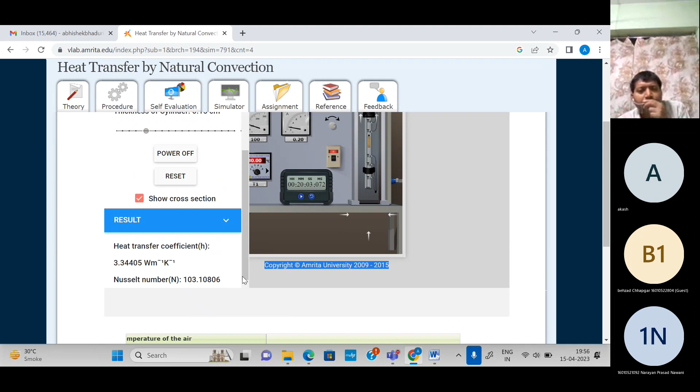If you compare the analytical result with the simulated result, it's comparable. But it's possible your result varies a bit, so don't worry, you need to check that if the Nusselt number value or the convective heat transfer coefficient value lies in the range 2 to 25, for either the simulation or the analytical, then it is acceptable.

अगर नियर वैल्यू नहीं भी आ रहा है, लेकिन दोनों का वैल्यू 2 से 25 के बीच आ रहा है एच का वैल्यू, तो इट इज एक्सेप्टेबल। और नसल नंबर में भी मे बी चेंजेस आ सकते हैं। इधर मान के चलो सिमुलेशन से नसल नंबर 70 आ रहा है, तो आपका एनालिटिकल का मे बी 120 आ सकता है। बिल्कुल कंपेरेबल नहीं आ रहा है, रिजल्ट डिफरेंट आ रहा है, बट इट इज इन रेंज, सो वी विल एक्सेप्ट दैट वैल्यू ऑफ नसल नंबर भी।

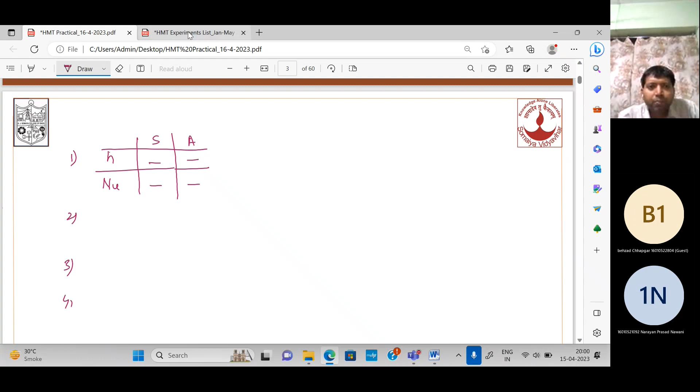ओके, तो लेट्स डिस्कस द नेक्स्ट एक्सपेरिमेंट। इसके बाद आप लोग फीडबैक दे दीजिए, एक्सपेरिमेंट परफॉर्म करने के बाद। नेक्स्ट एक्सपेरिमेंट करने के लिए भी, जो लिस्ट मैंने आपको दिया था, उसमें नाउ विल परफॉर्म द लास्ट एक्सपेरिमेंट, वर्चुअल लैब एक्सपेरिमेंट - स्टीफन बोल्ट्जमैन कांस्टेंट। तो कैसे असेस कर सकते हैं? आइदर यू क्लिक ऑन द लिंक, अदरवाइज द सेम प्रोसीजर।

Just give me a minute. Click on Google. Okay, so here in Google, we will click, we will write: virtual lab Stefan Boltzmann constant.

Amrita lab. Okay, now the things are simple. Now you are familiar with the first experiment, so this time we will be able to perform it very comfortably. Now you click here, okay, so it will open this page. Okay, yes, can you see my screen properly? Is anyone, please confirm? Hello? Yes, sir. Yes. Okay.

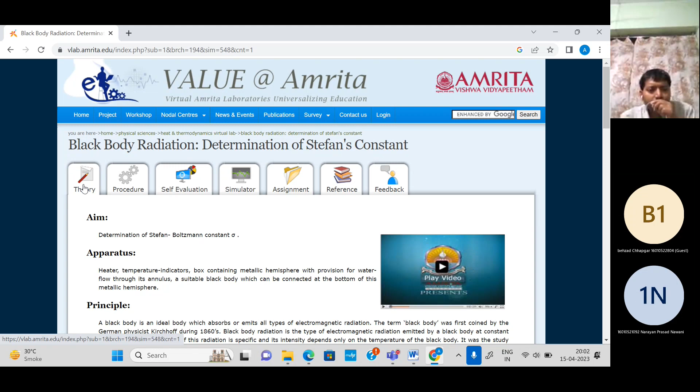These are the tabs. The theory tab is already enabled, so this will show the aim of this experiment, apparatus detail, and the principle of this concept. Okay, and the setup diagram, the construction of the setup, and the derivation - what is the mathematical expression for calculating the experimental value of Stefan Boltzmann constant and the applications.

Now the second tab, the procedure tab - here the steps are mentioned. Just follow the steps, so you will be able to perform this experiment. And then again, tab number 4 is most useful for us - that is the simulator tab for making the simulation. Okay, now let's see the theory tab.

You just see this here. The aim is to determine the Stefan Boltzmann constant. Okay, now what is the apparatus? You can see the heater is there and the temperature indicators are there for recording the temperature values at different locations. A box is there containing the metallic hemisphere, and the provision is there for the water flow through the annular space of this hemisphere.

So heater is there and we have provided the thermocouple at different locations on the surface of this hemisphere, and some at other locations also - that means at one disk also we will place the thermocouple, so we have to record the temperature value. With the help of this temperature indicator, we'll note down the temperature values. So a box is there that will contain the metallic hemisphere, and in this metallic hemisphere, a provision is there for allowing the water to flow through the annulars.

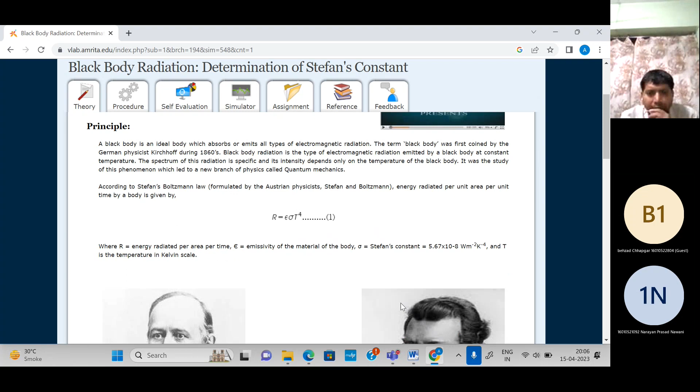Now, for the black body, the emissivity becomes 1. So the equation becomes R is equal to sigma T to the power 4.

Now let's see the schematic diagram of this setup. What we will do is take a geyser and fill it with water, or alternatively take a container, fill it with water, and provide a heater. We will turn on the heater so it heats the water inside this tank.

So what we'll do is take the geyser and fill it with water, then provide power supply to the geyser so it heats the water. Now we have taken a box, and inside this box a metallic hemisphere is there. In this metallic hemisphere, there is an annular space, and we will allow the hot water to flow inside this annular space of the hemisphere.

We have placed three thermocouples at three different locations on the surface of this hemisphere: T1, T2, T3. And what is T4? This is a copper disc, and we have applied a thick layer of lamp black color on this copper disc in order to convert it into a black body. So the temperature on this black body will be T4. We have to record four values of temperature: three on the surface of the hemisphere, and one for measuring the temperature on the black body.

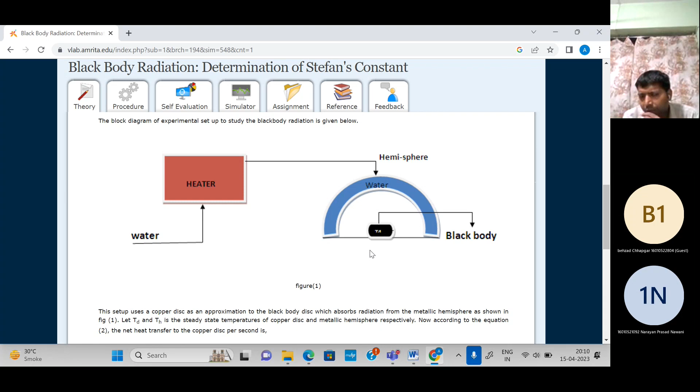Dt by d tau is the rate of change of temperature with respect to time. So this is the amount of energy stored in the black body, and this will be equal to the heat transfer that takes place by radiation from the surface of the hemisphere to the black body, which we can calculate by applying the Stefan Boltzmann law.

Now let's see this. So delta Q, simply this is Q. Heat transfer takes place by radiation from the surface of the hemisphere to the surface of the black body, which we can calculate by applying the Stefan Boltzmann law.

So what is Stefan Boltzmann law? Q is equal to sigma A times Th to the power 4 minus Td to the power 4, where A is the area of the copper disc. Th is the average steady state temperature on the surface of the hemisphere, and Td is the steady state temperature on the copper disc.

Now we can calculate, finally we will fit the disc. Now the entire box is closed. So here we will calculate the amount of energy stored in the copper disk, which we can calculate by mCp delta t.

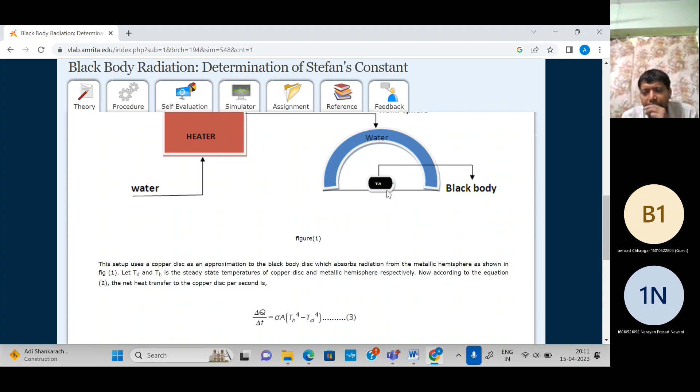So here it will be mCp dt by d tau, the rate of change of temperature with respect to time. Just see this: Q is equal to mCp d capital T by d small t. Either you take this symbol or dt by d tau.

You can take any symbol. It is nothing but the rate of change of temperature with respect to time, where m is the mass of the disk, Cp is the specific heat of the copper disk, and d capital T by d small t is the rate of change of temperature with respect to time.

Now by applying this, we will apply the energy equation. We will equate the two, because the energy stored in the copper disk will be equal to the amount of heat radiated from the surface of the hemisphere to the surface of this disk. So we'll equate these two.

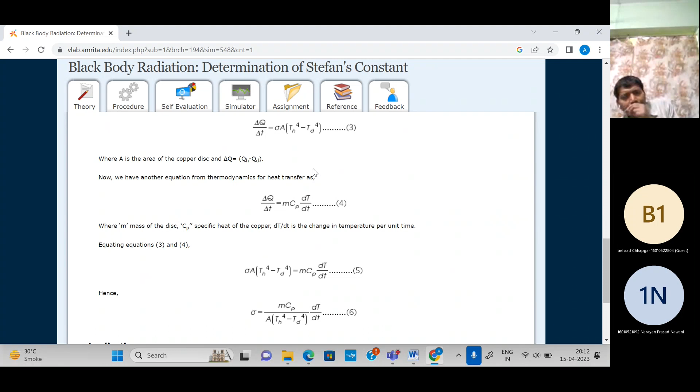Sigma A times Th to the power 4 minus Td to the power 4 is equal to mCp d capital T by d small t. Now from this we can calculate sigma. So sigma is equal to mCp divided by A times Th to the power 4 minus Td to the power 4, into d capital T by d small t. This is the mathematical expression for calculating the experimental value of Stefan Boltzmann constant.

Now these are the various applications of Stefan Boltzmann's law, of this black body radiation and the Stefan Boltzmann constant: determination of the temperature of the sun from its energy flux density, temperature of stars other than the sun, and also their radius relative to the sun can be approximated by similar means. So these are the applications of this concept.

Now we'll go to the procedure tab. So in the procedure tab, just see this, ultimately focus here. What we need to do is very simple. We know the standard value of Stefan Boltzmann constant, which is 5.67 into 10 to the power minus 8 watt per meter square Kelvin to the power 4.

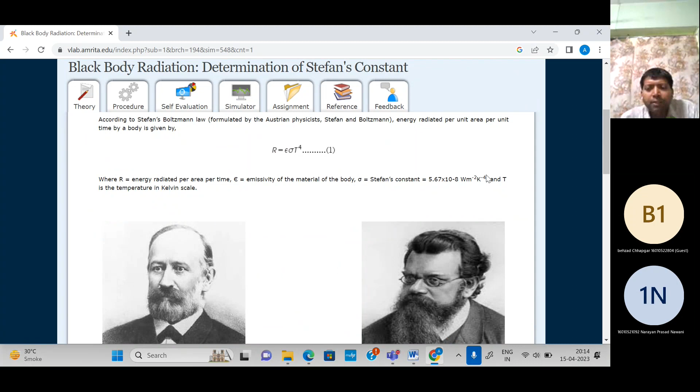The only thing is we have to work on this d capital T by d small t, that is the rate of change of temperature with respect to time. So for every particular interval of time, we have to note down the temperature value. Suppose after every 10 seconds, we have to note down the temperature value. So we will be able to generate a graph between temperature and time.

So with this, we will get the graph between temperature and time. Then we will be able to calculate the slope, because for this temperature-time curve, the rate of change of temperature with respect to time is nothing but the slope of this graph. So we will be able to calculate this rate of change of temperature with respect to time. Now the procedure.

So in this way we will feed all the values in that mathematical expression, and we will be able to calculate the experimental value of Stefan Boltzmann constant. And at the last, we will compare our experimental value of Stefan Boltzmann constant with the standard value. That's it.

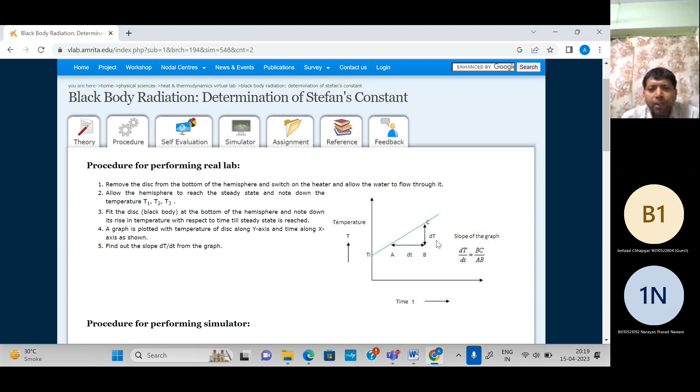So the entire box will be closed. We'll fit the disk at the bottom of this hemisphere. The entire box will be closed, and temperature rise will be there. So we have to note down the rise in temperature with respect to time till we achieve steady state. Every after a regular interval, maybe every 10 seconds or every 20 seconds, we have to note down the temperature value till we achieve steady state. So we will be able to generate the graph for temperature with respect to time, and then from this we'll calculate d capital T by d small t, the rate of change of temperature with respect to time, that means we will be able to calculate the slope of this graph.

This is the setup diagram. I will show this to you while performing.

So first of all, what do we need to do? Choose the desirable value of the water temperature, the surrounding temperature, the mass, and the radius of the disk with the help of the slider. We'll click on the power on button, wait till steady state is reached. We'll note down the steady state temperature values T1, T2, T3, and initially the ambient temperature value also, that will be T4. Now after this, note down T4 at different intervals of time till it reaches steady state temperature.

Plot the temperature-time graph and determine its slope, dT/dt. Now feed all the values into the mathematical expression for calculating the experimental value of Stefan Boltzmann constant.

This is the observation table. We will perform this experiment in three trials. In the first trial, we will note down the steady state temperature at three different locations on the hemisphere, that is T1, T2, T3, and note down the average value of steady state temperature on the hemisphere.

Now T4 is the temperature of the disk in Kelvin, and the time taken in seconds, and this is the steady state temperature value of the disk in Kelvin. For the second trial, we will perform this experiment again, and we will perform it a third time also.

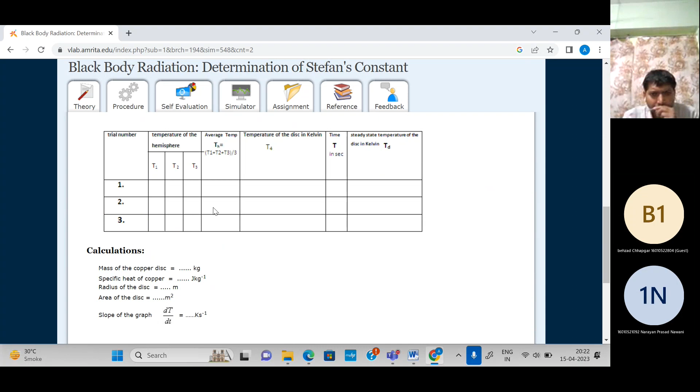But my suggestion is: calculate the Stefan Boltzmann constant for trial one, trial two, and trial three separately, then take the average value of the Stefan Boltzmann constant. That will be the average experimental value, which you compare with the standard value of Stefan Boltzmann constant, that is 5.67 into 10 to the power minus 8 watt per meter square Kelvin to the power 4.

Now here, for the mass of the copper disk, you have to mention the specific heat of copper that we can take. Now the radius of the disk, mention the area of the disk. Now the slope of the graph. Substitute all the values here in this mathematical expression so we can calculate the experimental value of Stefan Boltzmann constant, and write the result here.

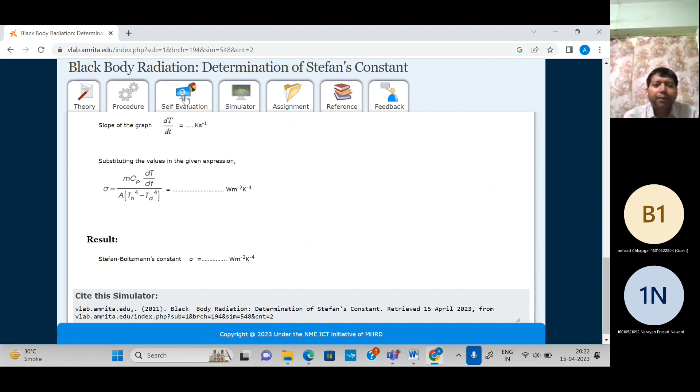Here also, when you go to the simulation self-evaluation, you will get MCQs which you can solve for testing and enhancing your knowledge, but it is not part of the simulation or the submission.

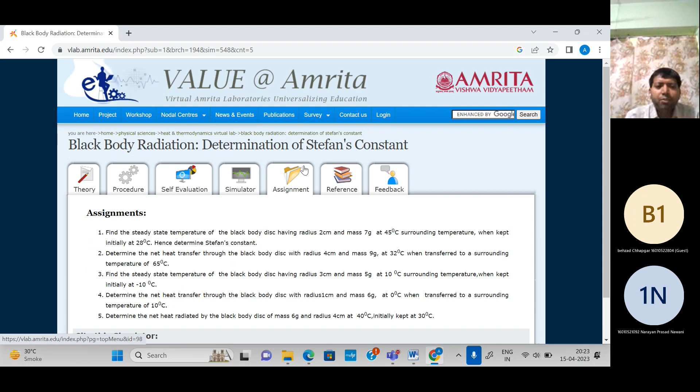When you click on the assignment, you will get assignment questions which you can solve for testing your knowledge, but it is not part of the submission. The reference tab is also there, where you can get references for preparing this virtual lab experiment, but it is also not part of the submission. After performing the experiment, you have to click on the feedback tab and give feedback without fail.

So remember, only three tabs are important for us: tab number one, the theory tab; tab number two, the procedure tab; and tab number four, the simulator tab for performing this experiment.

Now let's go ahead and perform this experiment. Just click on the simulator and open it in full screen. I will note down the values so that I can compare the results.

Okay, so suppose I have given the water temperature as 80 degrees Celsius. Now the surrounding temperature, suppose I have given this as 34 degrees Celsius. Mass of the disk I have given as 7.6 grams. Radius of the disk I have taken as 2.6 centimeter.

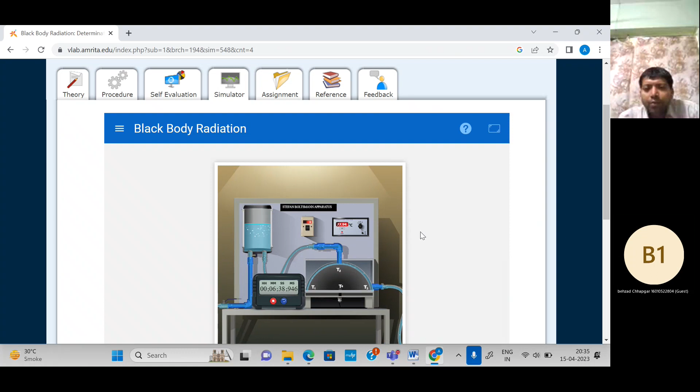So now we'll see the temperature value. It was 80 degrees Celsius. So to convert into Kelvin, we need to do 273 plus 80.

Just give me a minute, I will write the values in Kelvin.

Write the value. 80 plus 273 equals 353. T2 is also 353. T3 is also 353. Average value is 353.

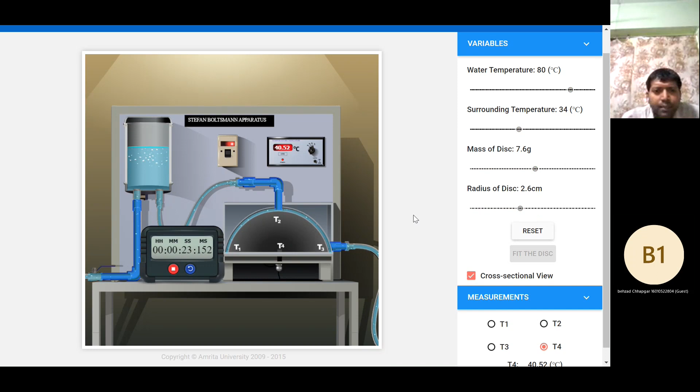Okay so fit the disk. You just see, the temperature is changing.

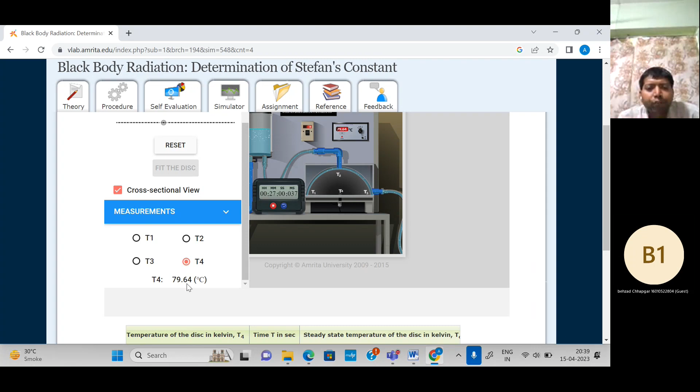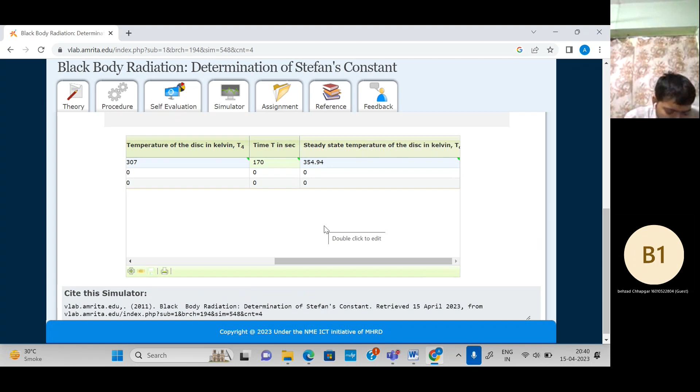So this value we have to note down here. So 79.64 plus 273 equals 352.64.

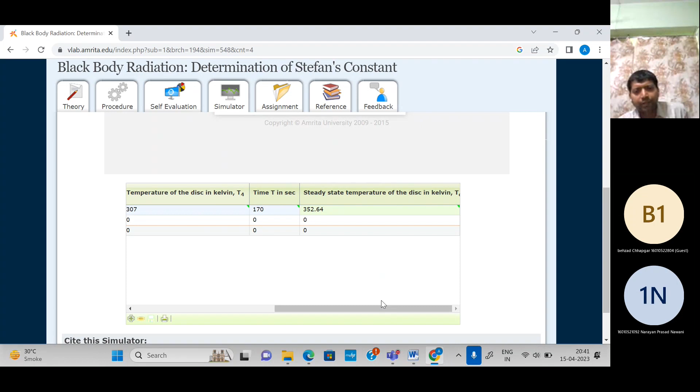For the second trial you take some different value of the temperature, feed that value, and for the third trial you feed the value here, and for each and every trial you calculate the Stefan Boltzmann constant, and finally you take the average Stefan Boltzmann constant, so this will be the average experimental value of Stefan Boltzmann constant. That we can calculate after feeding all these values in the mathematical expression.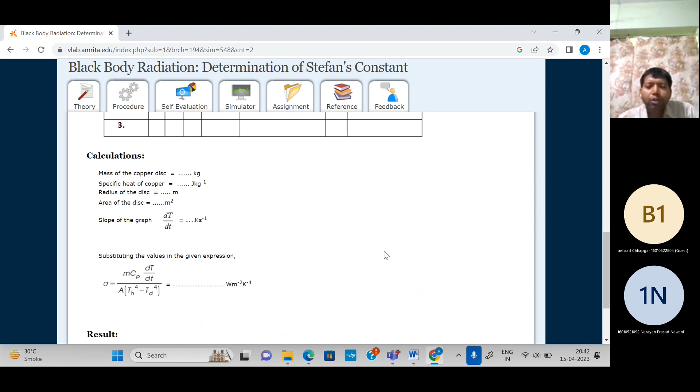Okay, so we have completed this. So now we have completed both the experiments. So now you complete these 2 experiments. So all the experiments are over. All the 10 experiments are over as far as our HMT lab is concerned.